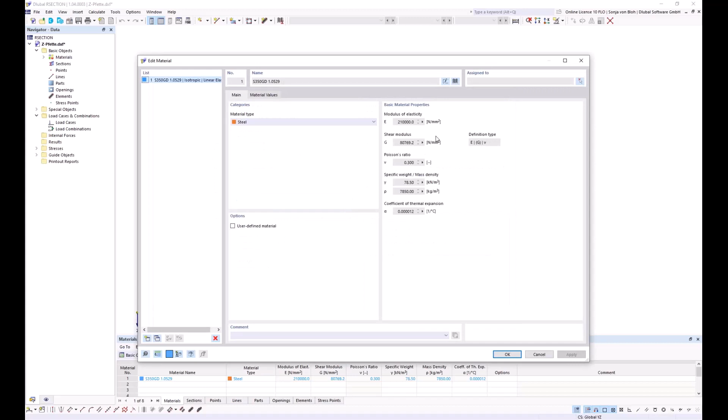Furthermore, I have to define the material here. I just want to use the material already shown, but if I wanted a different material, it would be possible to open the material library and select it from there. Okay, click here on cancel, then I start the import process and click OK.

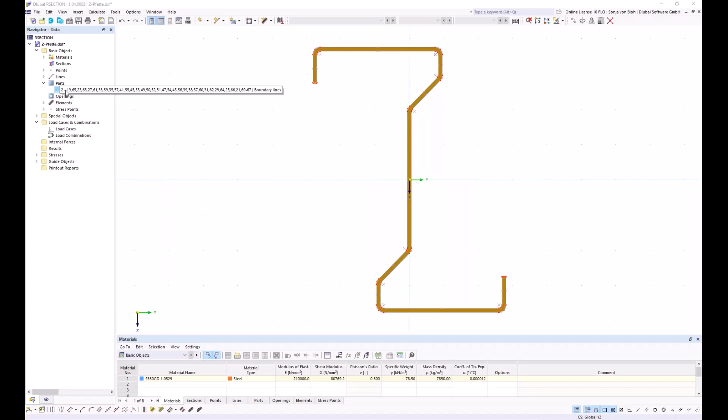With this import function, the part is created automatically, and the elements are also created automatically, as you can see here. The elements are required for the calculation using the thin-walled analysis and for the calculation of the effective cross-section.

I now want to go into the base data, and here I choose the analysis method. Two analysis methods are available: the finite element analysis and the thin-walled analysis. I choose the thin-walled analysis. As already mentioned, elements must be defined for this. This setting only affects the default setting in Rstab; if necessary, I can change the analysis method in Rstab.

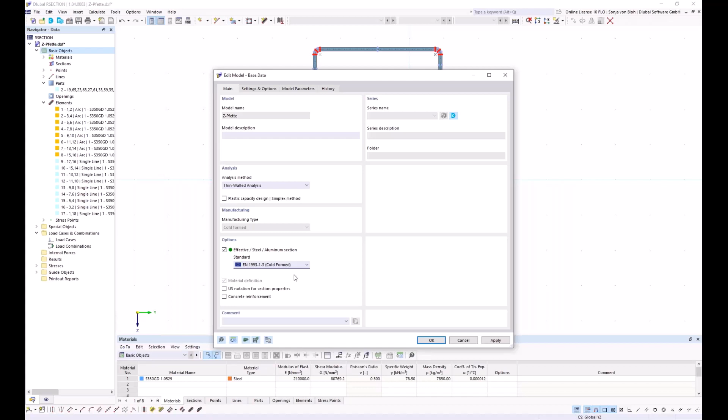Furthermore, I activate the add-on Effective Steel Section, and I choose the standard Eurocode 3 Part 1.3 for cold-formed cross-sections. This setting is necessary so that the steel design in Rstab is carried out according to the standard for cold-formed cross-sections. Then I click OK.

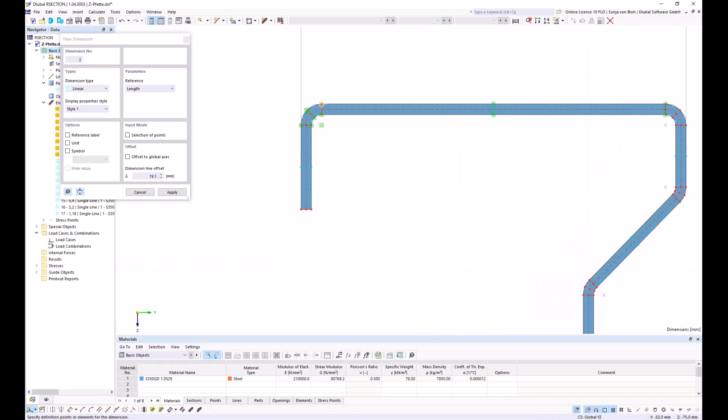It's also possible to dimension the cross-section. I will do this. For this, I create a new dimension and choose the corresponding points. These dimensions can also be displayed in Rstab.

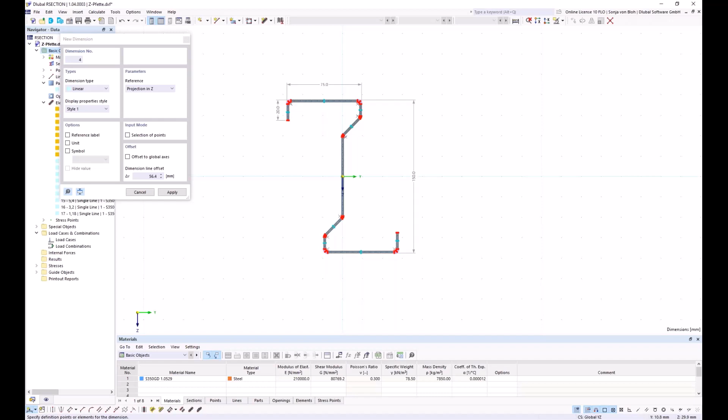In RSECTION, I can also calculate the effective cross-section and the stresses. This is useful, for example, for a preliminary design. This has been demonstrated in previous webinars, so I won't go into it today. However, it makes sense to start the calculation once to find any modeling errors. I go to Calculate All, and no error was shown, so it's possible to import this cross-section into Rstab.

Then I save this file, click on Save, and save it in this directory, and then I can switch to Rstab.

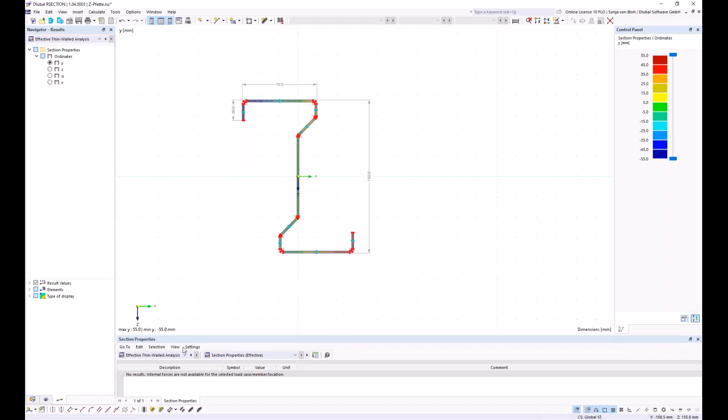I have already created the steel hall in RSTAB. The purlins consist of the cross-section just created in RSECTION. For now, I have assigned this cross-section to them, and I want to modify this cross-section.

For this, I open the Edit Section dialog, and then I open my cross-section library. And then I want to import my created cross-section in RSECTION.

The folder in which the RSECTION cross-section is stored must be integrated into the Dlubal Center. It's only possible via the Dlubal Center to import a cross-section from RSECTION.

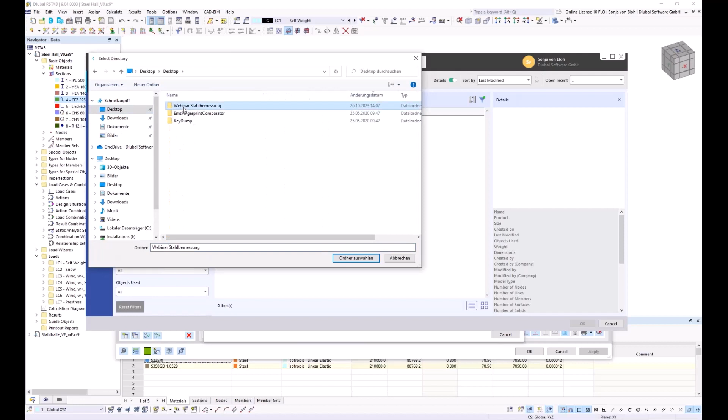And I want to put this folder directly under the project, so I check, choose Add Existing Project here from the context menu, and then I choose my folder. It's here on the desktop, and then I click on OK.

The folder is now linked to the Dlubal Center, and I can select the RSECTION cross-section.

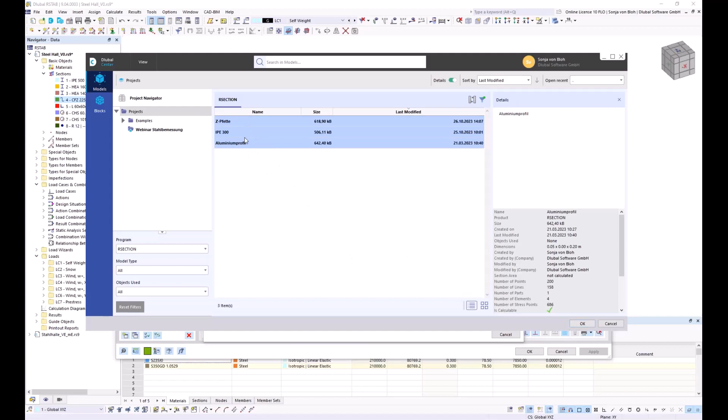It has recently become possible to import multiple cross-sections in one step. For this, I have to select these cross-sections, and then I can click on OK, and all the selected cross-sections will then be imported into RSTAB. Now I only want to import this cross-section, so I click on OK.

Here the checkbox thin-walled model is activated. This setting was taken from the chosen analysis method in RSECTION. However, I can also deactivate this option here so that the calculation of the gross cross-section properties is then carried out using the finite element analysis. If this option cannot be selected, then no elements are defined in the RSECTION cross-section.

You can see here in the graphic of the cross-section that the dimensions are shown. These are the dimensions I have created in RSECTION. And I click here on OK.

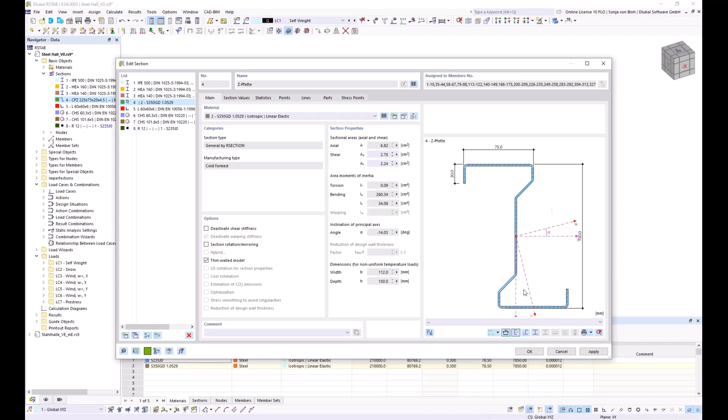For cold formed steel cross-sections, the center of shear lies outside the cross-section and the main axes are rotated. Usually the loads don't act on the shear center, which results in double bending and torsion. Usual lateral torsional buckling checks cannot be carried out.

Eurocode 3 Part 1.3 includes design methods for cold formed steel purlins, but the purlins must be within certain limits. These simplified design methods are not implemented in steel design. The lateral torsional buckling of any purlin can be carried out according to the second order theory, considering warping torsion and the use of equivalent imperfections.

I would like to show this approach today, and for the calculation considering the warping torsion, I first activate the add-on warping torsion in the base data. For this, I go to the base data, on top add-ons, and then I activate this checkbox here.

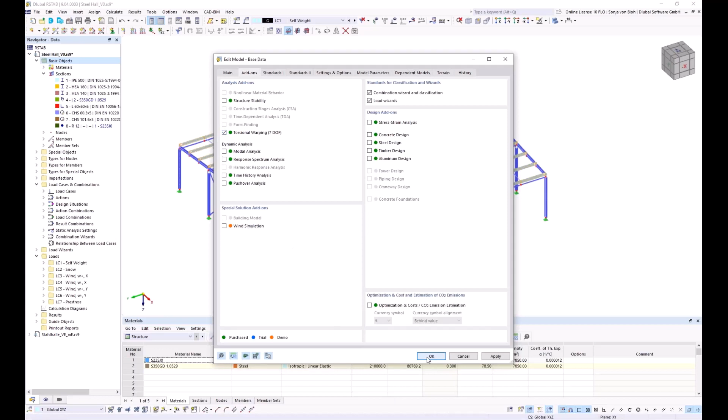Warping at the member ends is assumed to be unhindered by default. To transfer the warping between members that are connected, you can define a set of members.

The frames consist of several members. You can see it here. These members are divided, and this means that there are warping releases between each member.

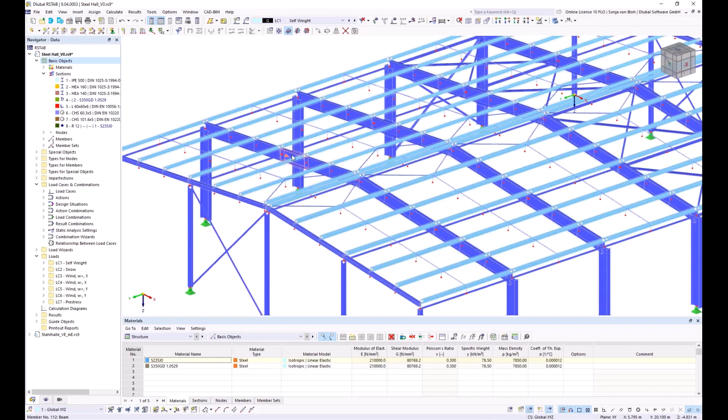The warping should be continuous for the frames, so I've already defined a set of members for them. I show you this in the wireframe model. Here I've created the set of members for each frame, and if I open the edit member set dialog, then you can see here a checkbox discontinuous torsional warping.

This option controls whether the warping should be transferred or not. This is supposed to be transferred, so I don't check this checkbox.

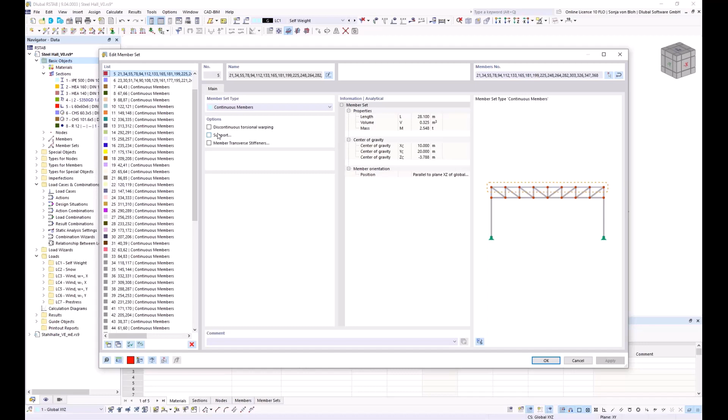Furthermore, the purlins are divided at the connection point here with the purlin suspensions, and the warping should be continuous for the purlins. So I've defined sets of members for the purlins too. You can see it here.

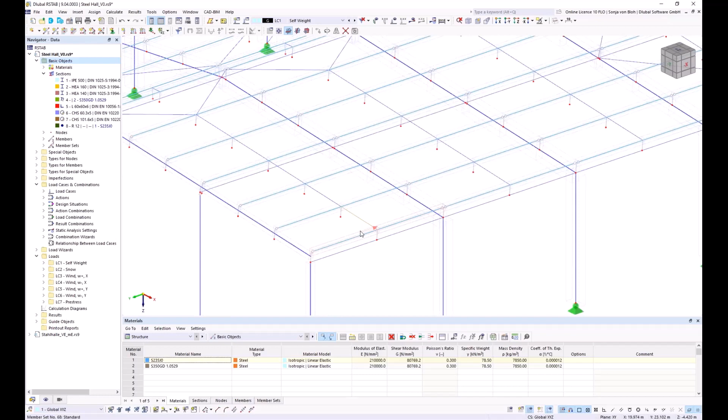When calculating with 7 degrees of freedom, the connection of members is always assumed to be at the shear center. If the connection is to be made at a different point, you can use member eccentricities, or you can also model the connection with rigid members.

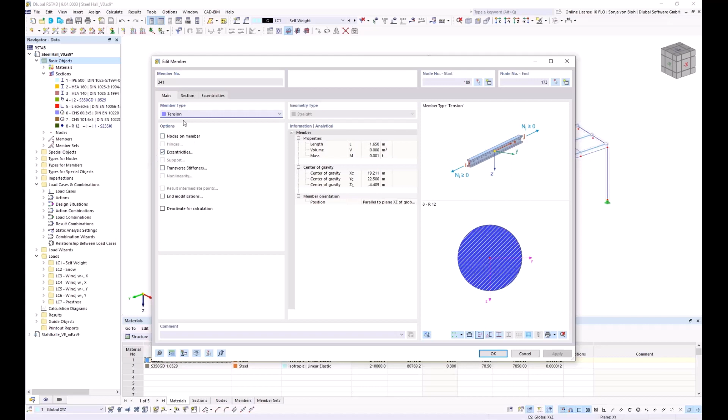In the steel hall, I have already defined member eccentricities for the transoms, the purlins, and the purlin suspensions. To do this, it's necessary to activate the checkbox eccentricity in the member dialog. I have done this here for the suspension. Here I've activated this checkbox eccentricities, and here in the tab eccentricity, it's possible to assign a member eccentricity to this member.

And I want to also look into this definition of the member eccentricity. You don't have to calculate the eccentricities manually, you can also define them relative to another cross-section.

I have used this option here. I have defined the eccentricity type relative to sections, and I have defined a transverse offset from the section of another member, so that the eccentricity is calculated automatically via the program.

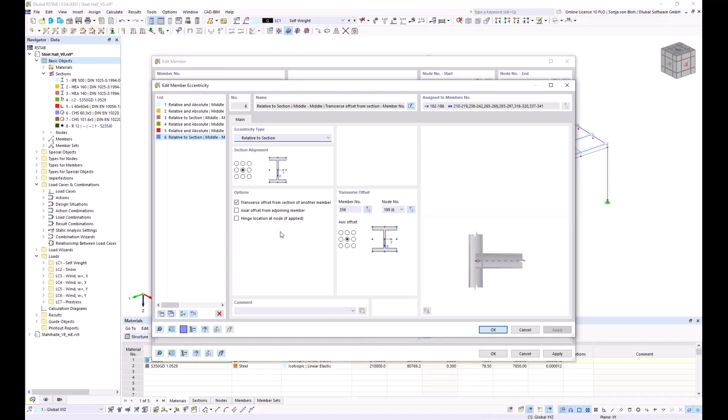The steel hall is covered with trapezoidal sheeting. I would like to use the trapezoidal sheeting as lateral and torsional support. I can take this stabilizing effect into account in RSTAB using shear panels and rotational restraints.

I first define the shear panel. I can do this via the navigator data. Here under types for members, I see member shear panels. I create a new one. There are different types of shear panels to choose from: trapezoidal sheeting, bracing, or trapezoidal sheeting and bracing. I want to define a trapezoidal sheeting, so I choose this type.

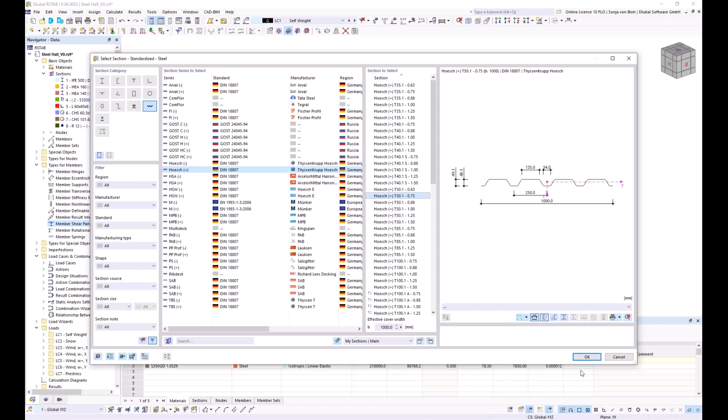Then I go to the tab trapezoidal sheeting, and I choose the trapezoidal sheeting from the library. I go here, and then I define this trapezoidal sheeting. It's a Hoesch T50.1-0.75. I click on OK. The trapezoidal sheeting is fastened in every rib, so I choose this option here.

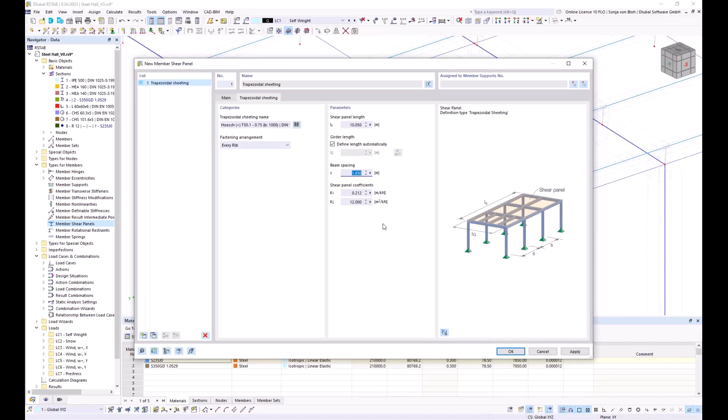The shear panel length corresponds to my roof length, and I can pick this graphically. I choose measure, then I choose my nodes, and now the shear panel length is defined with 10.05 meters. Then I have to define the beam spacing. I will do this also graphically. I measure this, and it's the spacing between the purlins, and then I click on OK.

Next, I define the rotational restraint. I find this also in navigator data here. I create a new member rotational restraint. There are also different rotational restraint types, continuous or discrete. For the trapezoidal sheeting, the restraint type is continuous.

Then I go to the tab continuous. The trapezoidal sheeting and the material can then be selected from the database. The purlin spacing and the continuous beam effect still need to be selected. The spring stiffness C100 must be determined depending on the load.

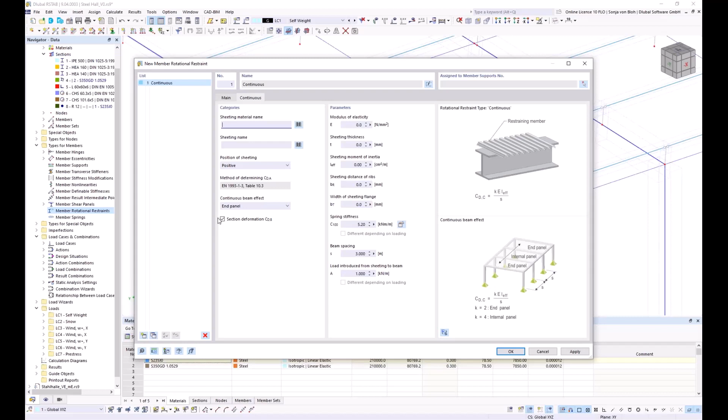Unfortunately, the effect of cross-section deformation on rotational restraint can only be calculated for I cross-sections, not for Z-section cross-sections. The calculated spring stiffness would therefore be on the unsafe side, so I have determined spring stiffness manually according to the formulas described in Eurocode 3 part 1.3.

I would like to consider the spring stiffness, so I go back to the tab main, and then I choose here the type manually, and then I define the rotational spring stiffness. I've calculated it to 1.07 kilonewton meter per meter.

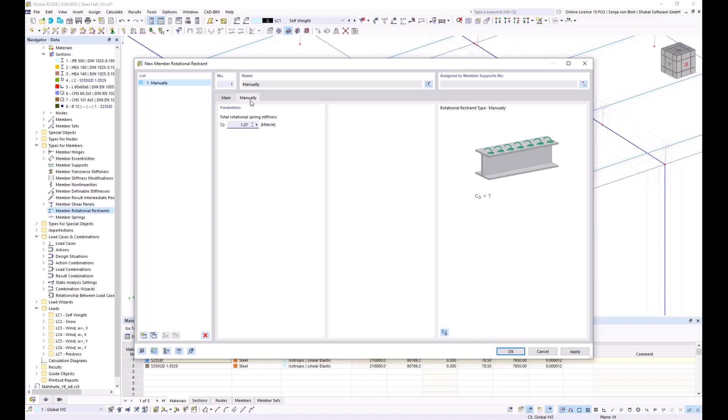I click here. I now have to assign the shear panel and the rotational restraint to member supports. I'm creating a new member support. I will do this also via the navigator data. And here I create a new member support, and then I choose my shear panel in Y and my rotational restraint about X.

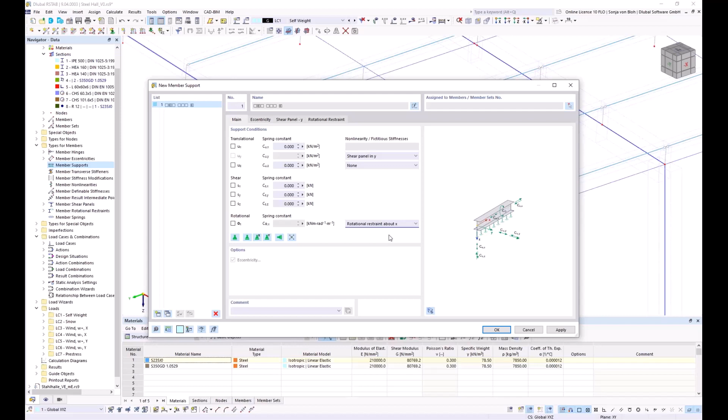The trapezoidal sheeting lies on the top of the purlin, so I define an eccentricity, and here I define the reference on the top here. Then I go to the tab shear panel in Y. Here I choose the shear panel type I've just created, and I will do this also for the rotational restraint. Here I choose the manually defined rotational restraint.

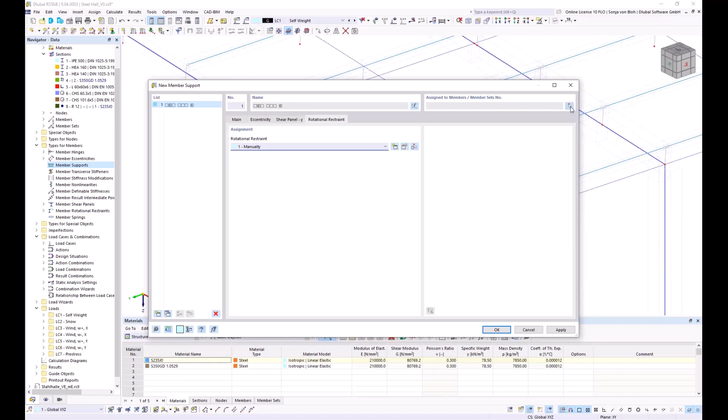I now assign the member support to the corresponding members. To do this, I click here on Pick Members, and I use visibility for it. Here I use a generated visibility. I choose the cross-section of my purlin. Then I activate the visibility, and then I choose here my members. Then click on OK and OK, and then the trapezoidal sheeting and the shear panel are assigned to these members.

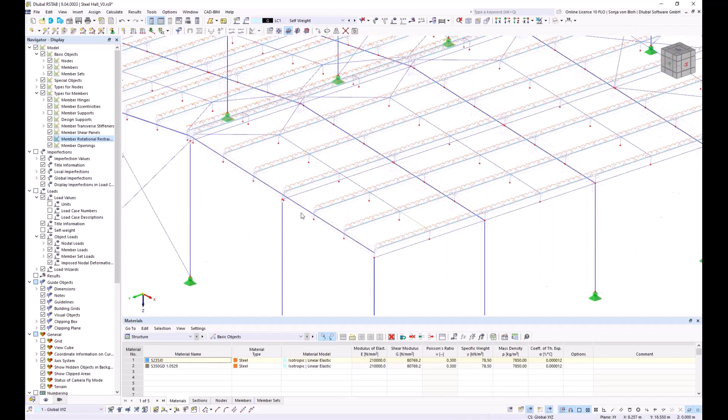It's also possible to display the rotational restraint and shear panel graphically. To do this, I go to the navigator display, and you can find the checkboxes here under types for members. Here I activate member shear panels and member rotational restraint. I will see it if I cancel the visibility mode. Here you can see now the shear panel and rotational restraint graphically. Okay, I can uncheck these checkboxes again. I don't need it now.

By default, rotational restraint and shear panel are not taken into account in the static, stability, and modal analysis. I can also take these into account by using a structure modification. I want to create this structure modification. I find it in navigator data here under special objects, and here I define a new structure modification. The consideration of shear panels and rotational restraints is already activated here via this checkbox.

Then I modify the name of this structure modification. I name it: consider shear panel and rotational restraint.

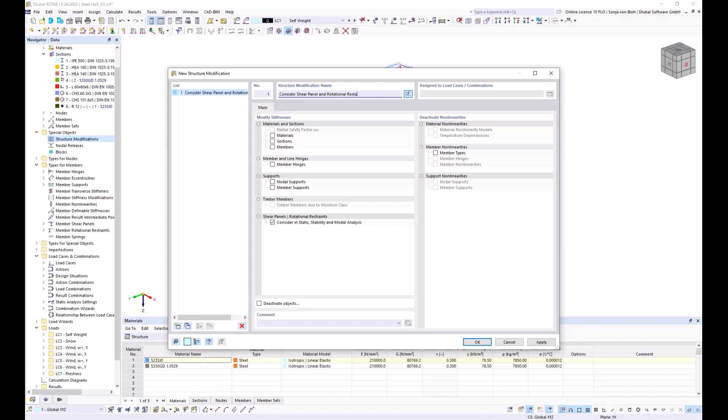I click OK. I then have to assign this structure modification to the relevant load cases or load combinations in which it should be taken into account. For this, I use the combination wizard, found in Navigator Data. I open it, and the only thing I have to do is check the checkbox 'consider structure modification' and choose the corresponding structure modification. Then I click OK.

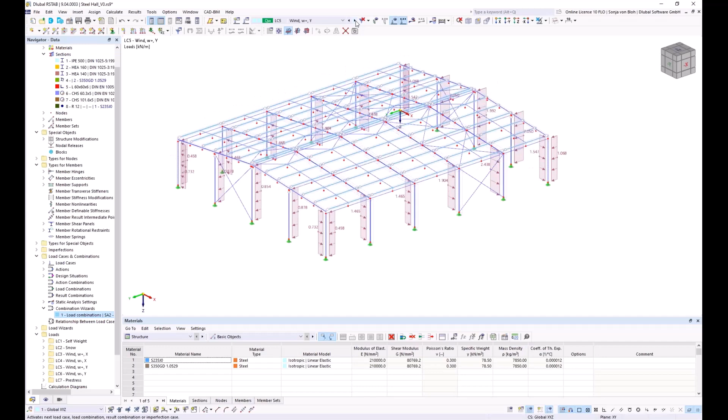I've already defined dead load, snow load, wind in X direction and Y direction. I will show you this by activating the view. Here I have the load case self weight, then snow, and also wind in X direction and Y direction, and also a pre-stress on the bracings.

I want to go back to my loads applied on the purlins. If a member load without eccentricity is defined, the load always acts at the center of gravity in the calculation with 7 degrees of freedom. I will go into this load, and here I have the possibility to define an eccentricity.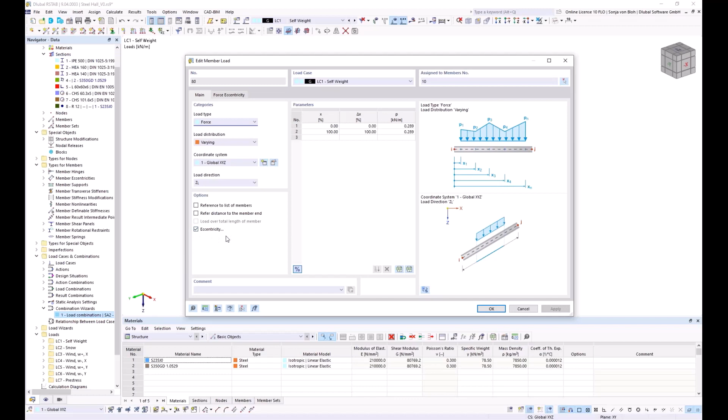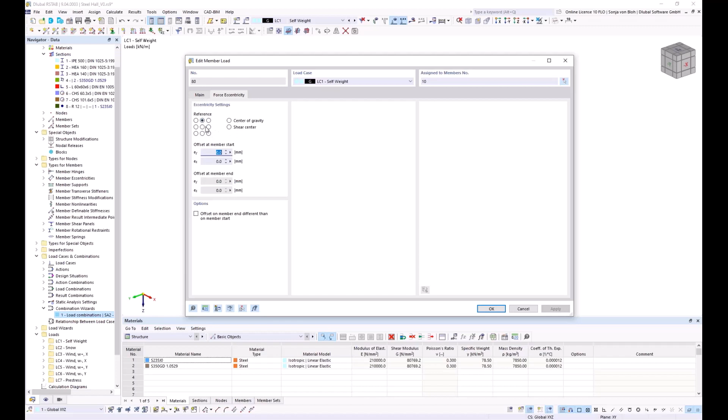If the load acts on another position, it's possible to change this via an eccentricity. I've activated the eccentricity checkbox, and in the force eccentricity it's possible to define the eccentricity for the loads. The load should act on the top of the cross section, so I've defined the reference on the top. I click here, OK.

I've already created global imperfections. I will show you this now. I've created global imperfection in plus X direction and also in plus Y direction. I now have to define the initial bow imperfection for the purlins. The various options for defining imperfections have already been demonstrated in previous webinars.

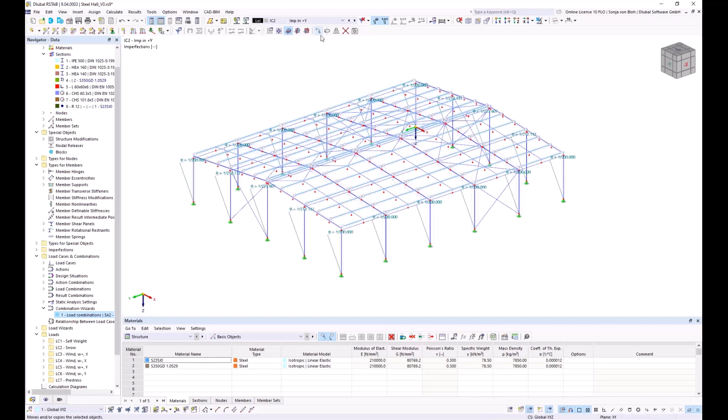Today I would like to show the definition of local member imperfections. The purlin is supported in the Y direction by the purlin suspension, so a two-wave imperfection shape would be possible. If the suspension is not stiff enough, a single wave imperfection shape would also be possible. For the imperfections, I could now create two imperfection cases. However, it's also possible to use a stability analysis to obtain information about the imperfection to be applied and thus reduce the number of imperfection cases.

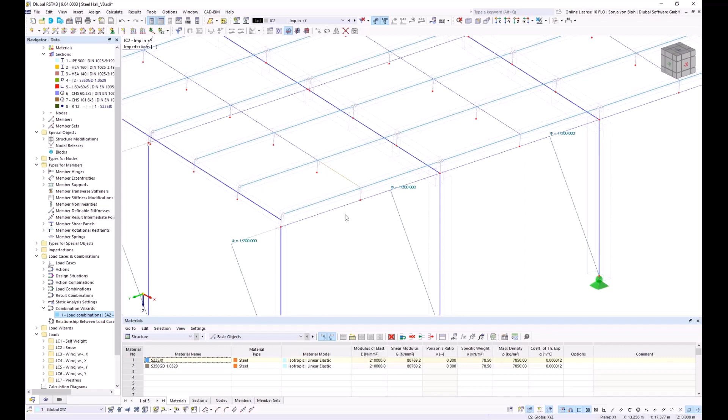I would like to show this now. I go to Navigator Data, then Base Data, and activate the checkbox Structure Stability. Then I click OK. I first look at the stability analysis settings by opening this. I assume that local mode shapes for the purlins only appear at higher eigenvalues, so I increase the number of eigenvalues to be calculated to 25.

In the combination wizard, I activate the stability analysis with the calculation of 25 eigenvalues, and I also change my static analysis settings to first order theory. Then I name this wizard stability.

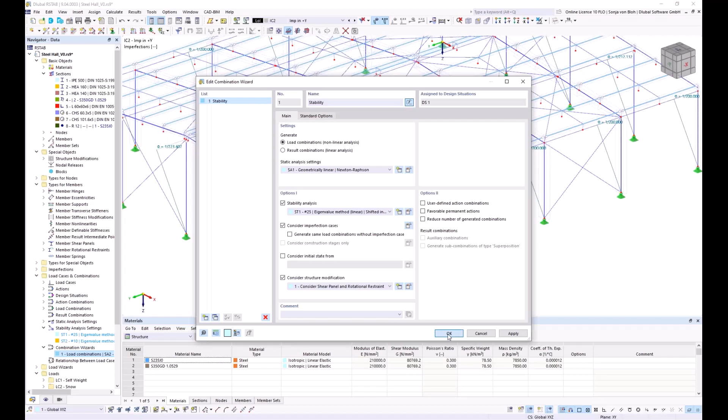I open the design situations, and here the combination wizard stability is already chosen. Now the load combinations are generated considering the global imperfection, my structure modification, and my structure stability add-on.

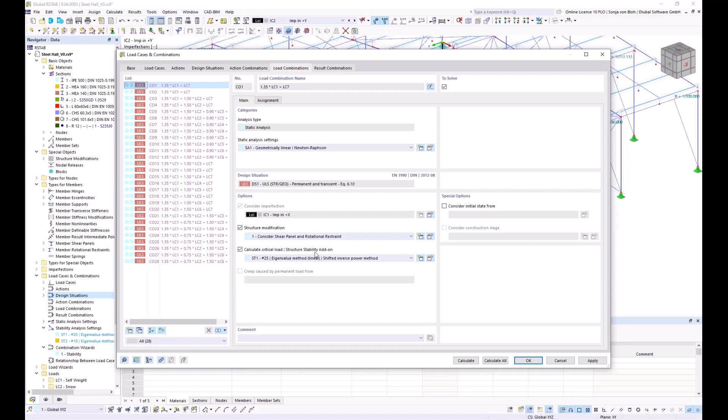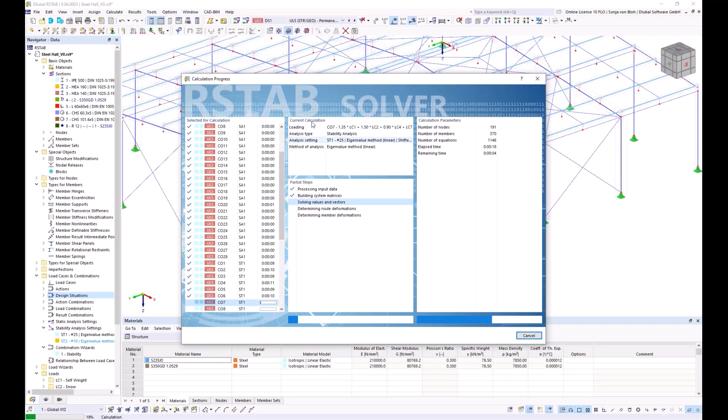I now run the calculation for design situation 1. A message informs me that the cross sections or topology of the members in the member set are not compatible, and the warping may not be able to be transferred. The reason is, among other things, that the member set of the frame is not straight - you can see the column here angled to the other frame. I assume the warping can be transferred through the connection, so I ignore this warning message, and the warping is then transferred.

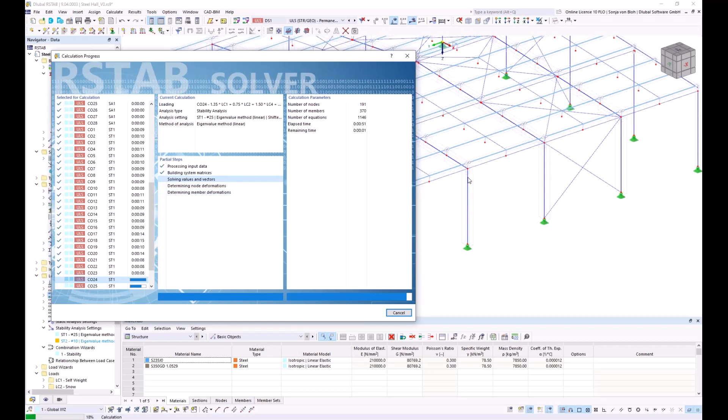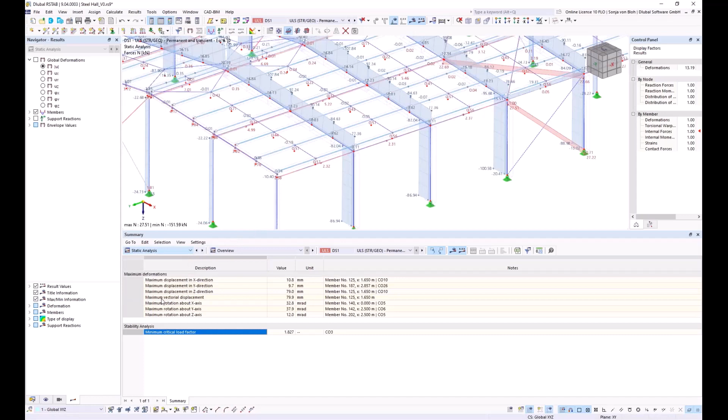On the overview, I can see that the minimum critical load factor is calculated in load combination 3. I will go to the stability analysis and open load combination 3.

I deactivate the display of the loads. As part of the stability analysis evaluation by mode shape, the mode relevance factor can be used to quickly differentiate between local and global mode shapes. A mode relevance factor of 100% means that a single member has maximum relevance for the considered mode shape.

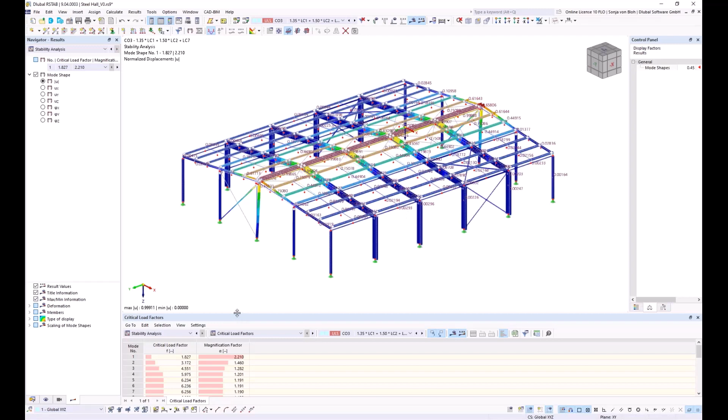To look into the mode relevance factor, I open a different table: results by member, effective lengths and critical loads by member, where you can see this mode relevance factor for all members.

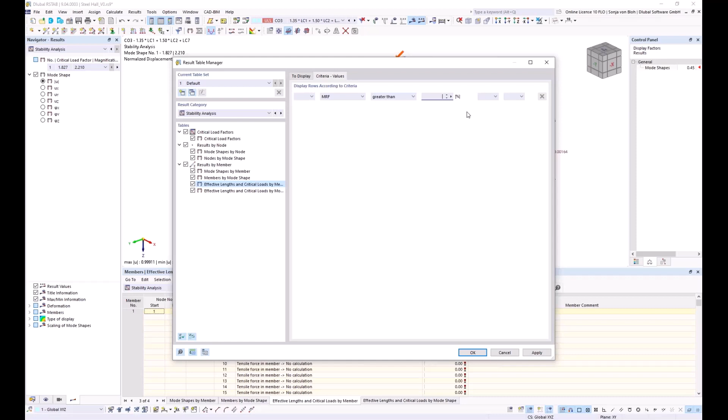I can also use the filter option to output only mode relevance factors greater than a certain value. I open the result table manager and activate the checkbox 'according to criteria', then choose the mode relevance factor. I want to see only mode relevance factors greater than 70%, and click OK.

I want to see my member number 258, and this member has a mode relevance factor of 100%, which means this is a local eigenvalue.

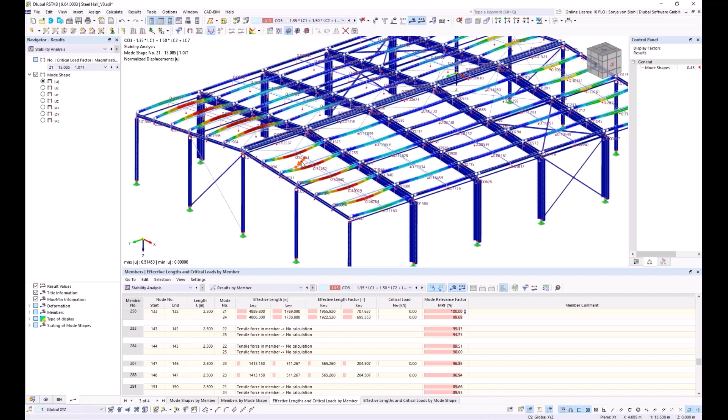And I can see for this also the mode shape, and this is a single wave here for the purlins. So I have only to define a single wave shape for the bow imperfection. I will do this now.

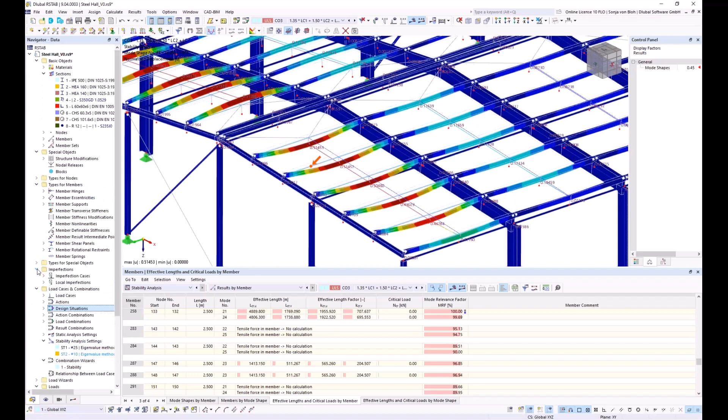For this, I create a new imperfection load case. I open the navigator data again, and then I create here a new imperfection case. I name it imperfection in plus Y direction, and I choose here the imperfection type local imperfections.

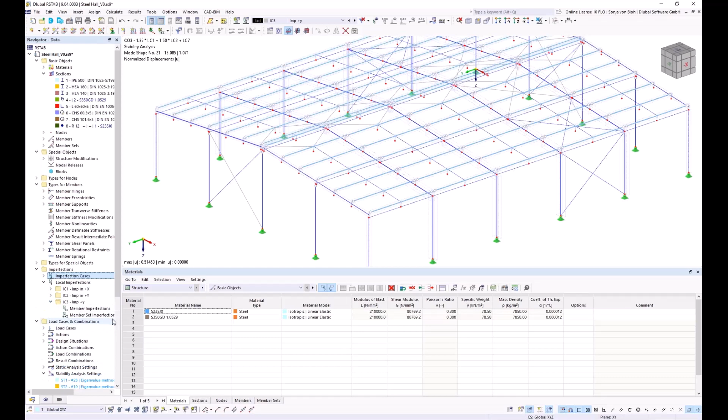I now have to define the local imperfections, and I define a new member set imperfections. And here I choose the imperfection type initial bow. And as definition type, I choose manually relative.

And for the Z cross-section, I use according to table 6.3 of Eurocode 3 part 1.3, the buckling curve B, so that I define an initial bow of 1 divided by 250, and I want to assign this initial bow to the imperfection direction Y.

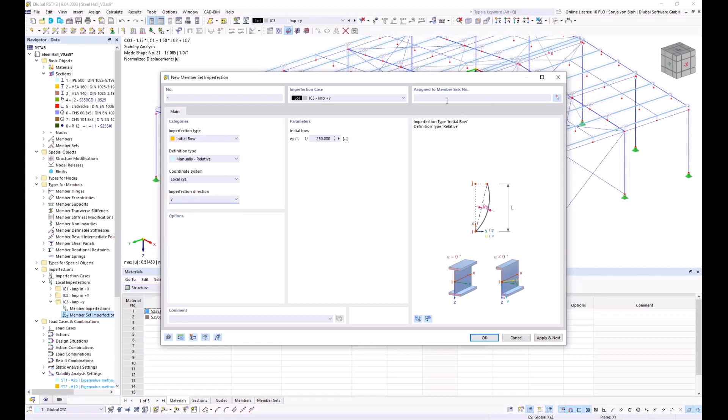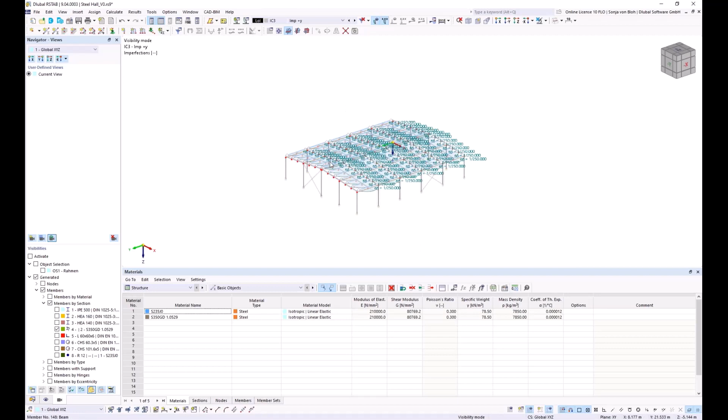Now I have to choose the member sets, and I activate here my visibility once again. I choose then the member sets, and I click on OK. I can show this also graphically if I activate the Show Imperfection button.

I now have to define the imperfection also in the opposite direction, and I will do this by copying the imperfection case, imperfection in plus Y. To do this, I go to the navigator data again, and I open here my imperfection case. I choose it, and then I click on button copy selected imperfection case. I rename this case, and then I click on OK.

And all I have to do is now to change the imperfection direction to minus Y.

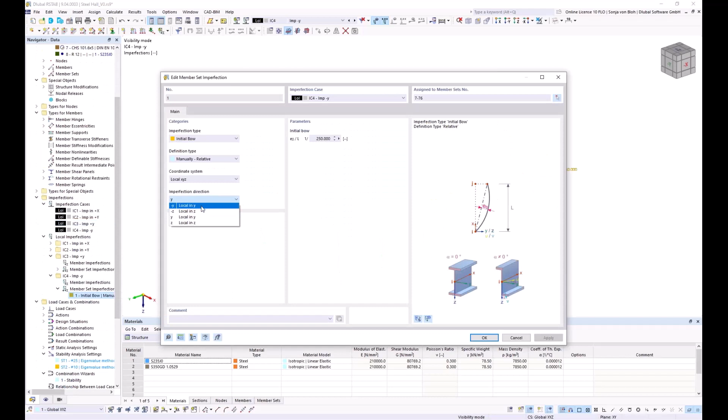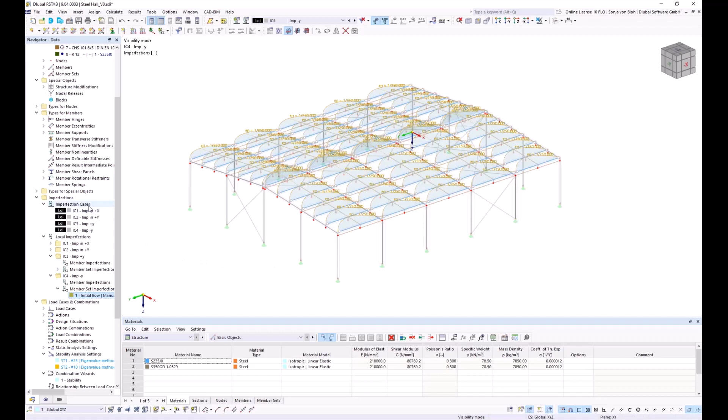I would now like to combine the imperfections with each other. For the combination of imperfections, I create a group of imperfection cases, and I will do this here in the Edit Imperfection Case window. Here I create a new imperfection case from imperfection type group of imperfection cases, and I want to combine first my imperfection in global X direction with my imperfection in plus Y direction.

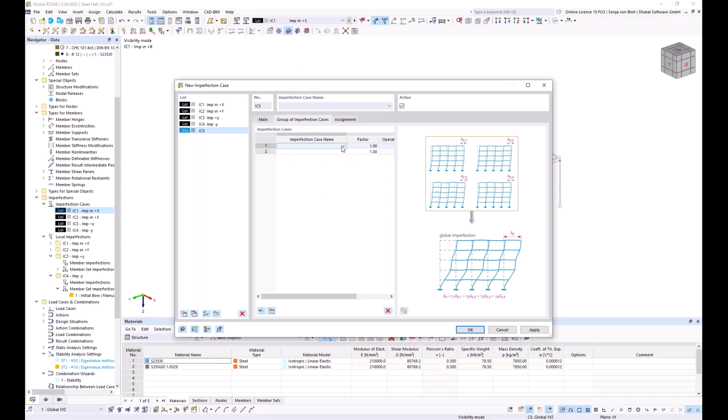For this, I go to the tab group of imperfection cases, and then I create a new line, and here I choose imperfection in plus X with the operator and imperfection in plus Y, and I name it imp plus X plus Y. The other imperfections I create by copying.

So I select this group of imperfection, and then I click here on copy selected imperfection cases, and here I change the parameters to minus Y, and I need this also for the global direction Y. So I copy this.

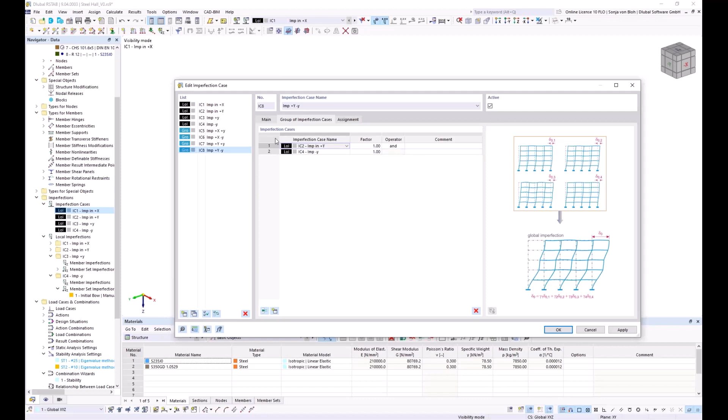And all I have to do is to change here the name and the imperfection. So that the individual imperfections are not taken into account in the combinatorics, I deactivate for them the checkbox active, and then I click here on OK.

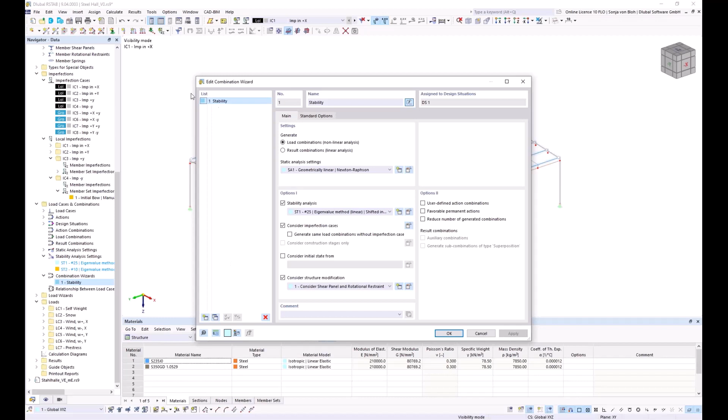Then I have to modify my combination wizard, or create a new combination wizard for my design situation. For this, I open the combination wizard dialog and I copy the stability wizard, and I name it here design.

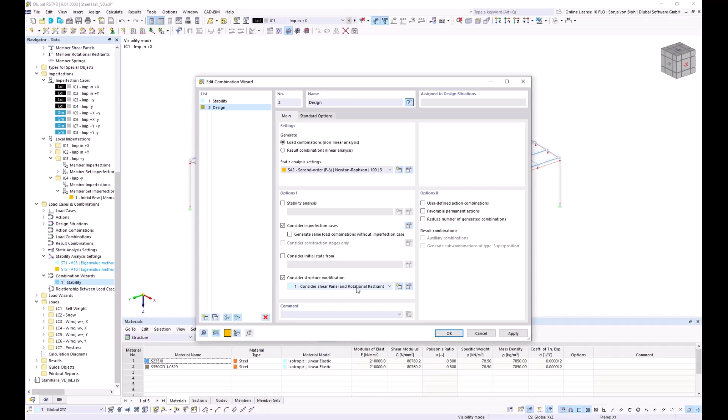And I want to do my design according to the second order theory. So I choose here second order. I don't want to use the stability analysis anymore. And I want to consider my imperfection cases and my structure modification. Then I click on OK.

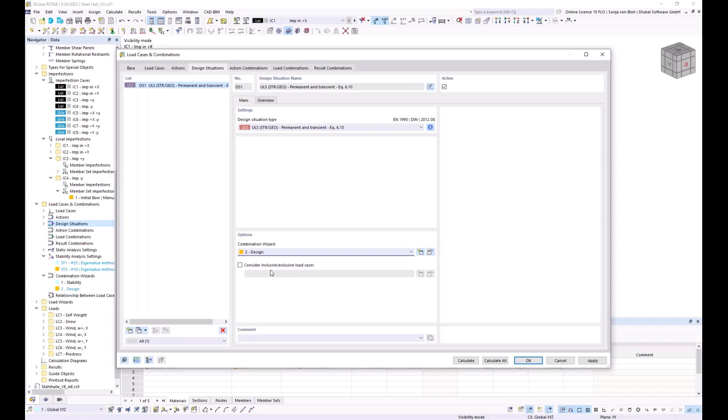I now have to assign this combination wizard to my design situation. For this, I edit my design situation, and here I choose now the combination wizard for the design. If I go here, then I can see the results from my load combination. Here the imperfections are considered and also the structure modification.

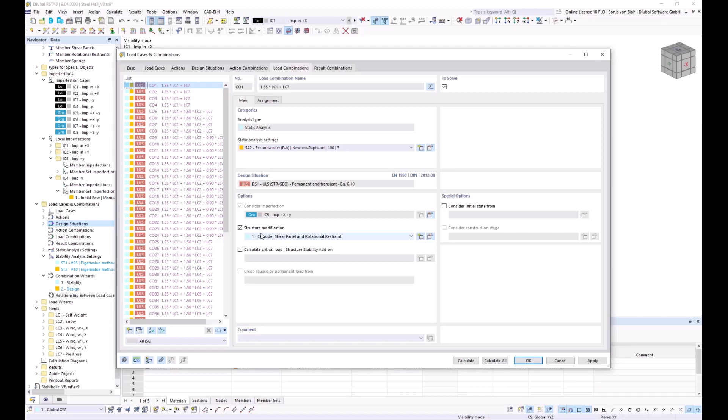The structure is complete so that I can make the settings for the steel design. For this, I first activate the steel design add-on in the base data. In the base data, here on tab add-ons, I activate here the steel design, and on the tab standards, I select the standard that I want to use.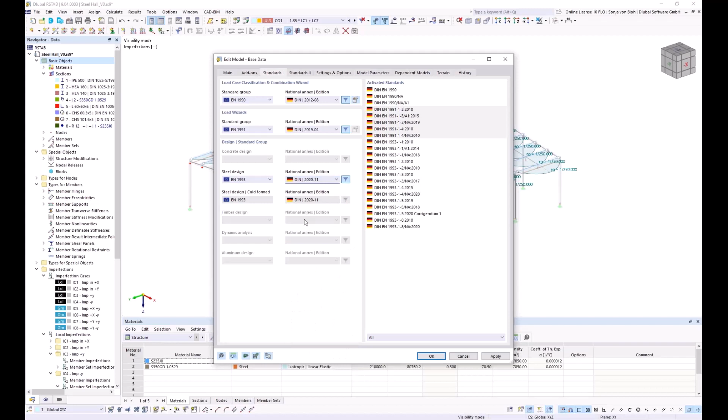I select here the Eurocode 3, and I select the German national annex, and click then on OK.

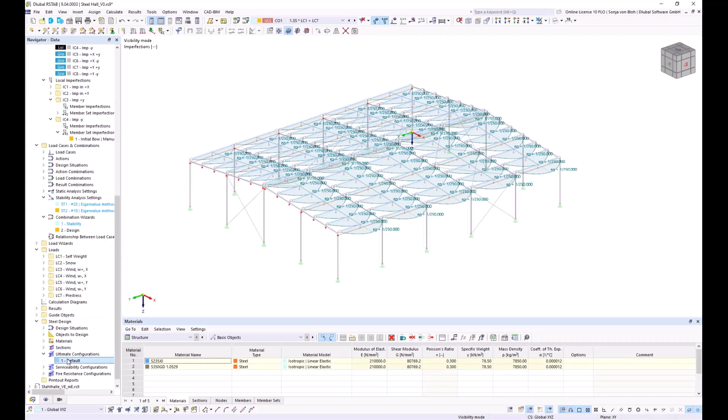I now want to look into the ultimate configuration for the steel design. I find it here also in Navigator Data, Ultimate Configuration, and here I deactivate the checkbox Perform Stability Design, since all stability effects are already included in the calculation. Therefore, only cross-section checks have to be carried out, but with the partial safety factor gamma M1 for stability designs.

For this, I have to activate this checkbox. Here in chapter Design of Cold Form Sections, the steel design derives from the manufacturing type, whether the design must be carried out according to Eurocode 3 Part 1.1 or Eurocode 3 Part 1.3 for cold formed cross sections.

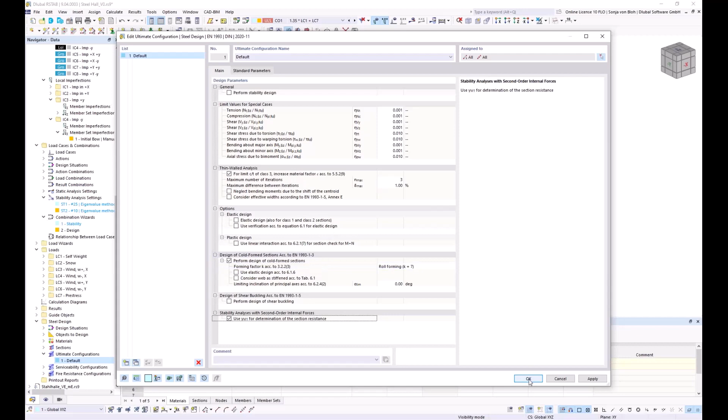If I deactivate here this checkbox Perform Designs of Cold Form Sections, then the design would be carried out according to Eurocode 3 Part 1.1. Then I click here on OK.

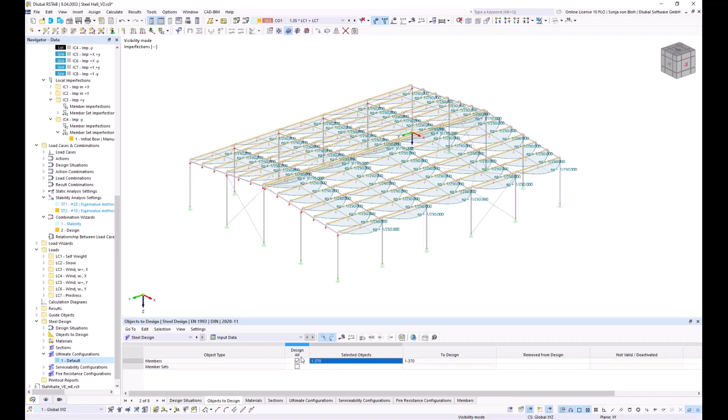In the table for steel design, in the add-on steel design tab Objects to Design, I choose the members that I want to design. I want to design all purlins. I deactivate the member sets checkbox, then I choose the purlins. I activate the visibility first, select all my purlins, and click OK.

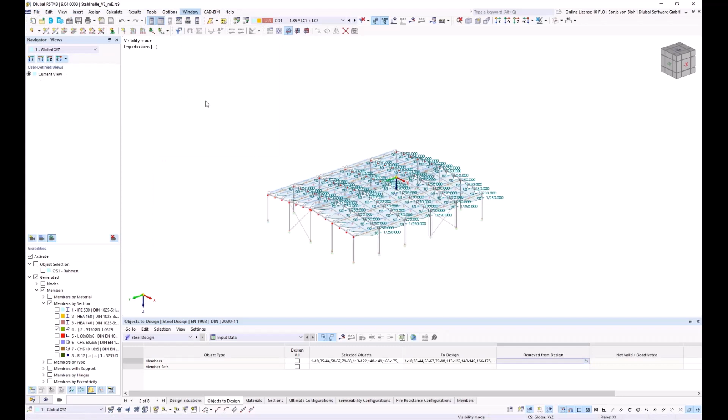The calculation takes time because the effective cross-section is calculated in an iterative process. I will therefore show you the results in a calculated model.

Here I go to the design ratios on members. In the table, the numerical results of the design are shown. To display the details, I double click on the corresponding table row.

Separate effective cross sections are calculated for axial force, major axis bending, and minor axis bending. According to the information from the Standards Committee of Germany, the effective cross-section can also be calculated for the combination of internal forces in a design with 7 degrees of freedom using imperfections. We will implement this in future.

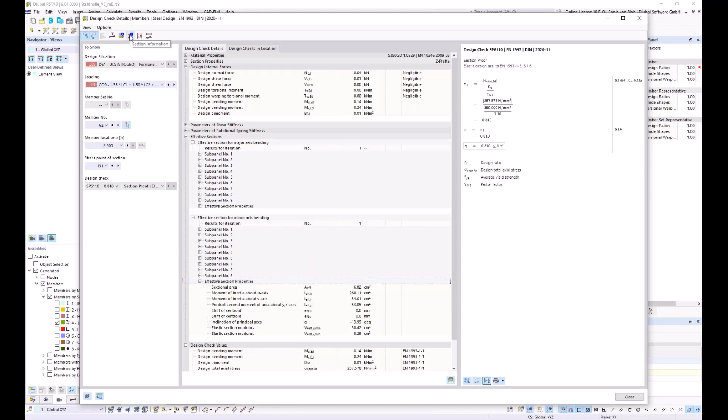The effect of distortional buckling is determined using the finite strip method. You can display the mode shape via this button here, section information. Here we have the buckling shape for only axial force, for major axis bending, and for minor axis bending.

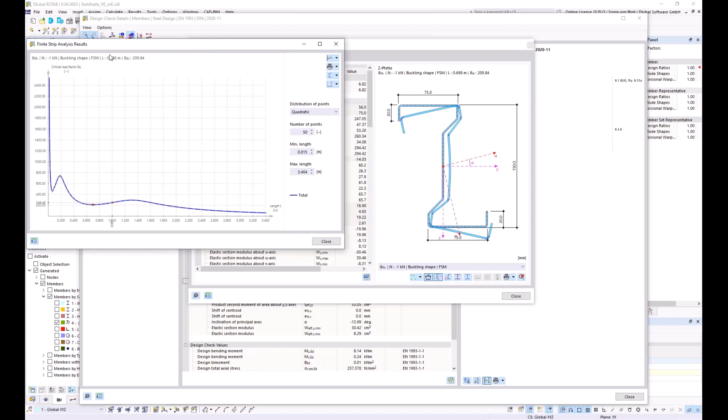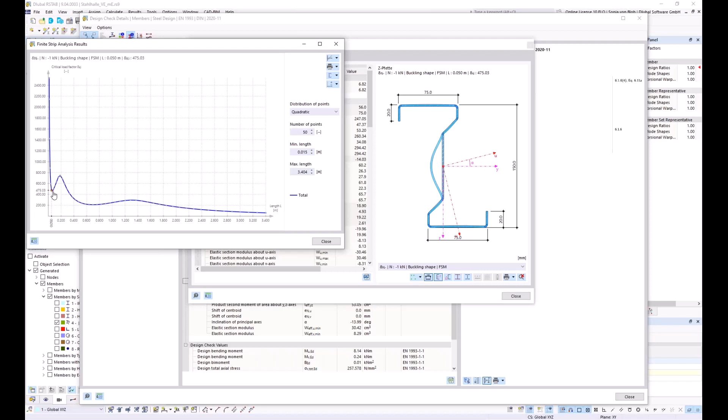I will show you here the buckling shape for only axial force, and by default the mode shape for distortional buckling with the associated critical load factor is displayed first. By clicking on the point on the graphics, further forms of instability can be displayed. Here you see the instability form for local buckling.

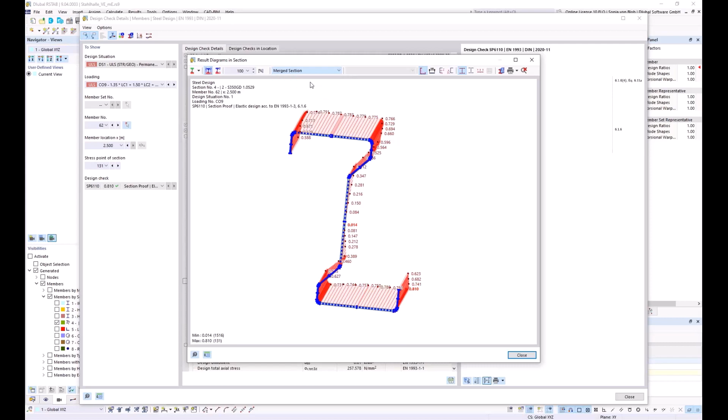The stresses can also be displayed graphically. To do this, I open the result diagrams in section, and it's possible to display stresses on the gross cross section, and also on the effective section. If I want to see the effective section due to minor axis bending, I choose this setting, and I can now see this element is reduced due to local buckling, and here the lip is reduced due to distortional buckling.

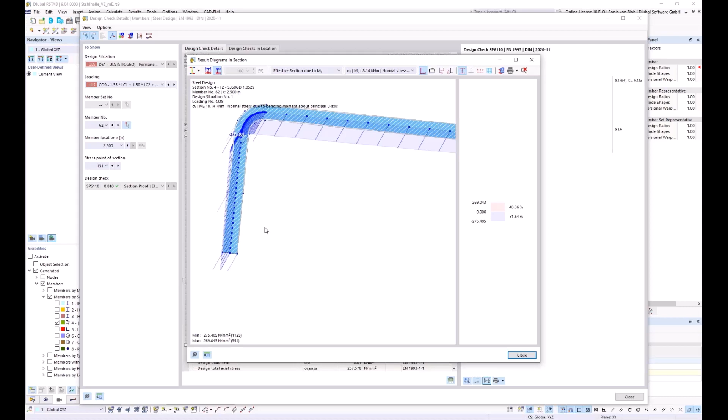The elastic design according to chapter 6.1.6 is carried out. The utilization is below 1 for all purlins, so the cross-section and stability checks are fulfilled. That brings me to the end of the webinar. I hope it helps you in designing cold-formed cross-sections and steel design. I now give the floor back to Andreas.